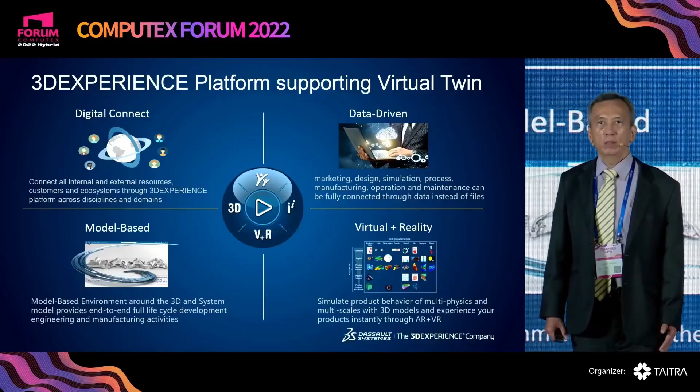And the fourth one is virtual and reality. Through our simulation technology, you can simulate your product's behavior and performance with multi-physics and multi-scale. And during the process, anytime, you can wear your AR, VR to experience your product's performance.

So on our 3D experience platform, these are just apps. You have apps to manage your project, to manage your BOM, and for social design - it's like your internal Facebook, but you're sharing your design ideas with your colleagues. You have a 3D modeling app, so you can design from material to a product, to a car, to a city.

You can just make your 3D model, and then on the same platform, you could have your simulation and manufacturing apps. You can work on your 3D data and continue to perform your multi-field simulation, like structure, fluid, or electromagnetic simulation. Then you can have your process planning for your digital plant. And on the same platform, we have an information intelligence app, so you can analyze and help make decisions quickly.

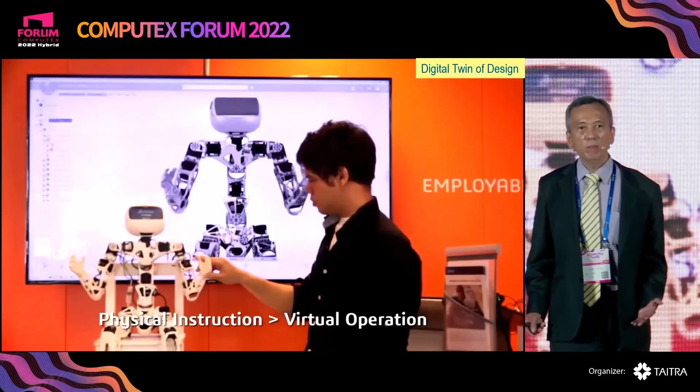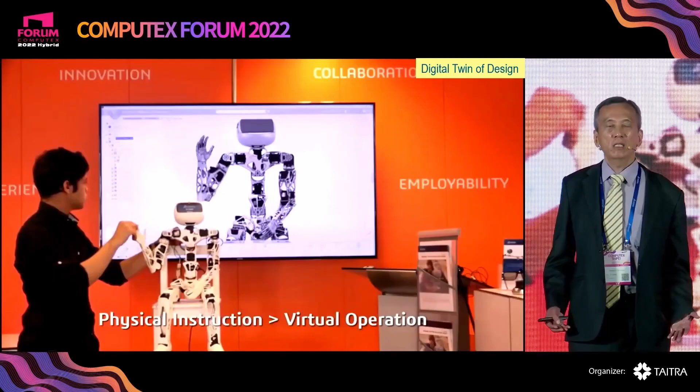So what is a virtual twin? A virtual twin is not just a 3D representation of your product. It could include the control system, firmware, software - everything necessary to make your product work.

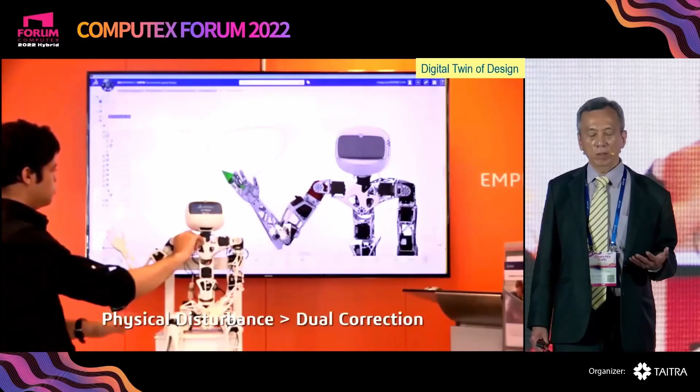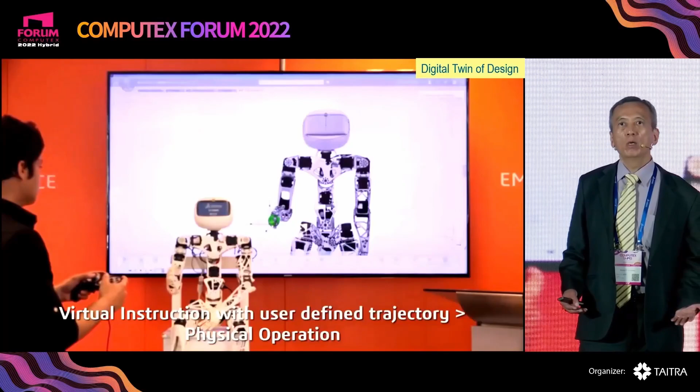When your design is complete and the product is produced, you can connect your complete virtual twin to your physical product. In reverse, you can collect data from your physical system and then analyze, optimize, and improve your production. So in reverse, it's possible for you to drive your physical system from your virtual twin - it's a two-way communication between the physical product and the virtual twin.

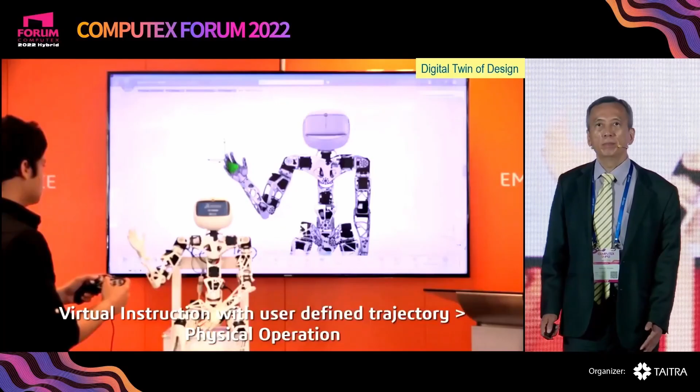During your design process, maybe some of your subsystem prototyping is ready. For example, your steering wheel is ready. You just put on your ECU, your control unit, and then connect it to your virtual twin. So your hardware can link with your digital twin and send a signal to the virtual twin to run a simulation.

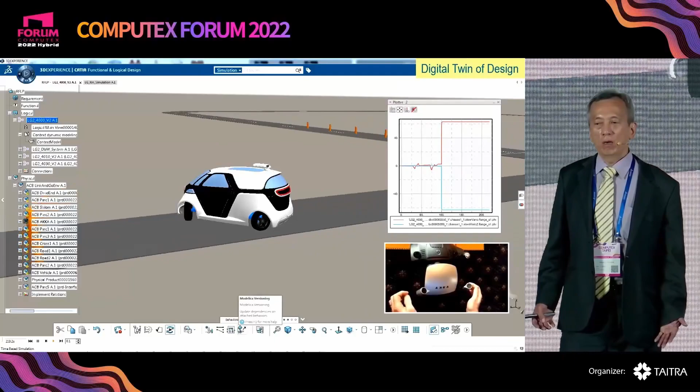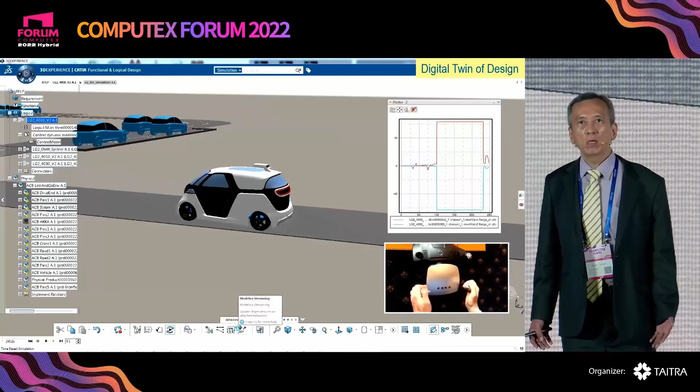So you see, you have the complete definition of your virtual car, and you are able to validate and simulate all the innovation design. For example, with this electrical vehicle, you might have a new design to turn your car around at a point. So you can validate all the control system and mechanism, to see if it works as your design. Since it's a virtual twin, you can analyze the performance of any component.

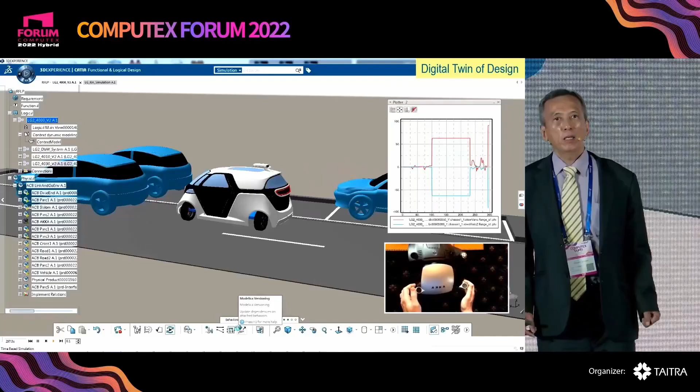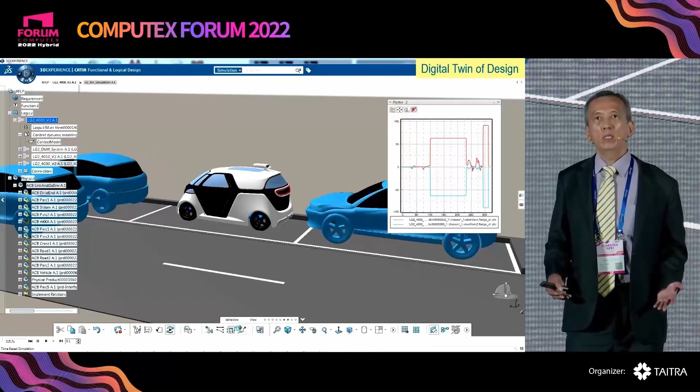You don't need to put a physical sensor on a real car. You can simulate all the driving conditions. For example, you will have an exciting innovation for you to do street parking just by driving your car sideways into the parking lot. So you want to make sure it works - with your hardware, software, everything. So this is a virtual twin of a system.

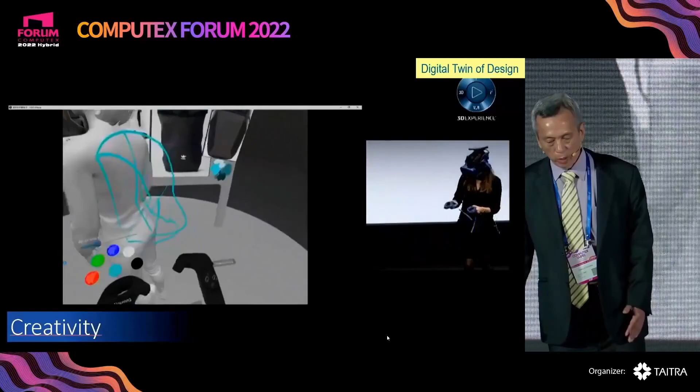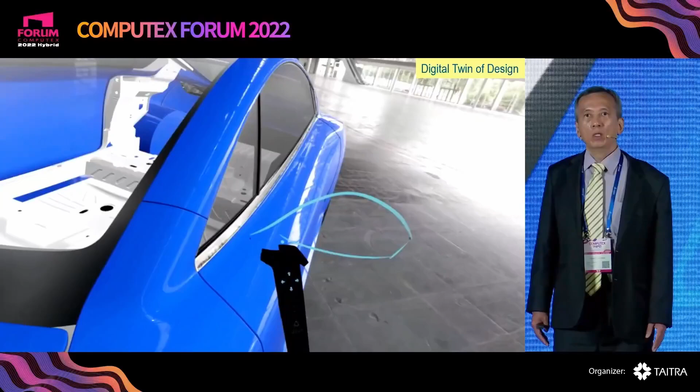So how do we work with VR, AR? First, we can use VR for design. You start sketching your idea with VR, with an immersive experience. Or even you can work with an existing 3D model, and then explore more of your design ideas and options, and then improve your product. So with VR, you can sketch, and you can even sketch on your 3D model.

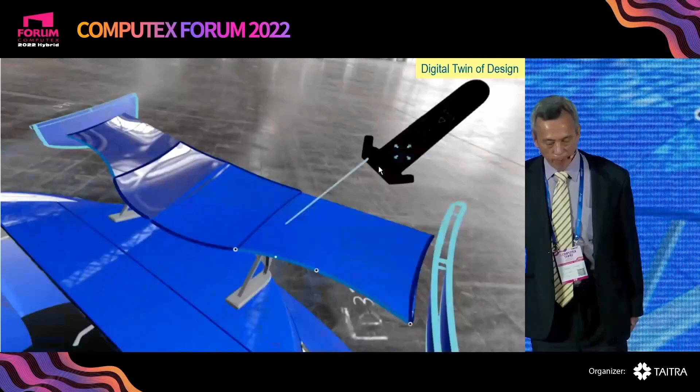It looks like you are sketching on your clay model. You just start from your existing design, and then sketch it, and you get your new idea. So this is how we provide VR to explore your digital virtual twin. You can also use VR to modify your design instantly inside your virtual twin.

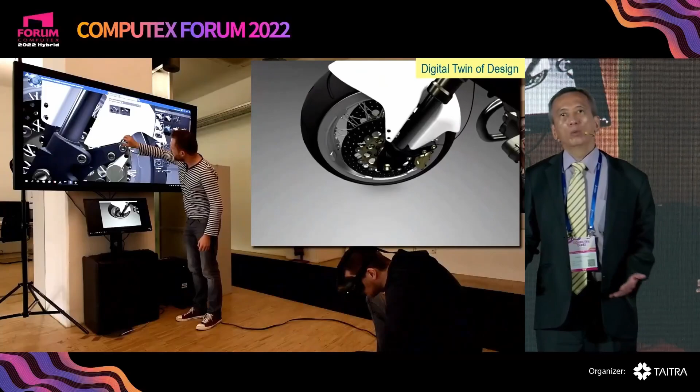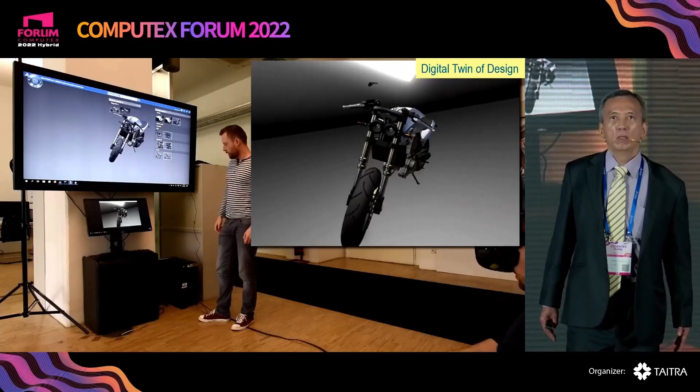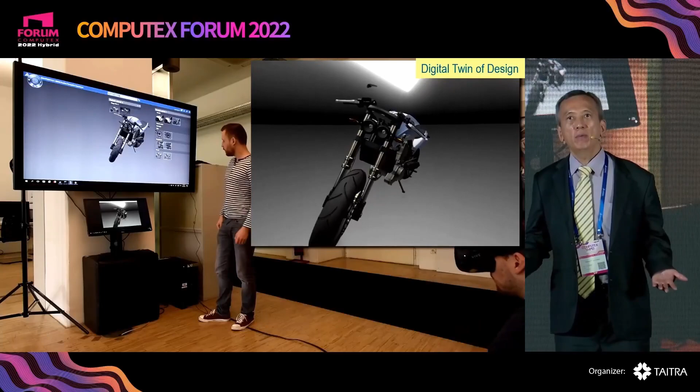Okay, so then we move to the detailed design. There are many design activities - you will design your mechanism, your metal parts, composite parts. Anytime you want to review it, you just put on your VR device. You don't need to export your 3D data to VR animation software where you'd need to redefine everything. You just stay on the same platform, just click on an app.

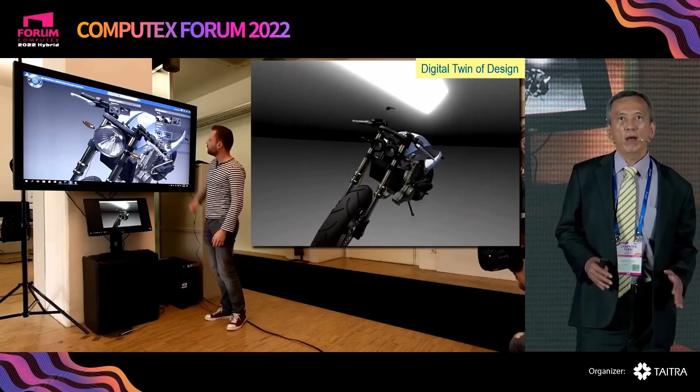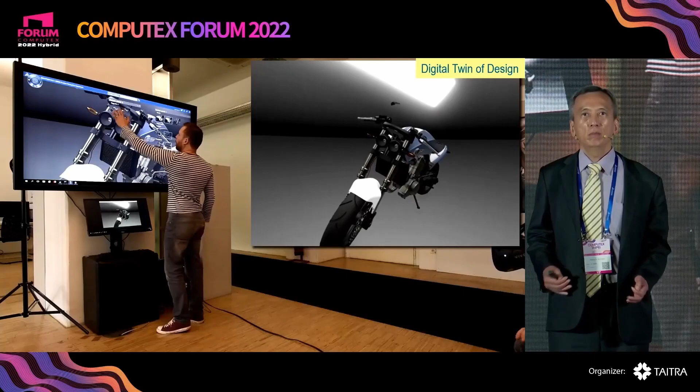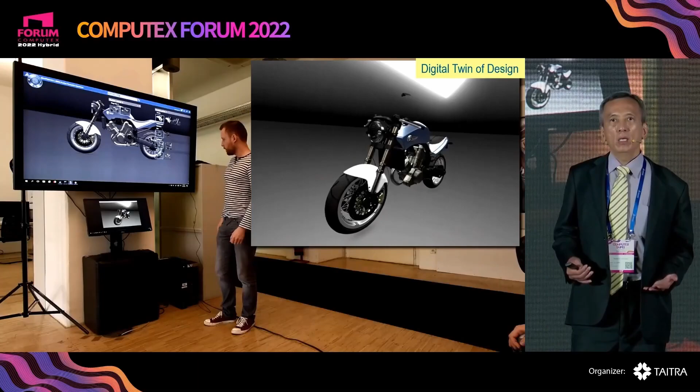So now you can review your product in rendering or in your mechanical design view. You can explore your portfolio with different combinations, different ideas, and discuss. If you have some new idea, you can just take off the VR, modify it in your system, and then come back to review. So the VR device is used for daily design and daily work - you can even work with your customer to propose your solution.

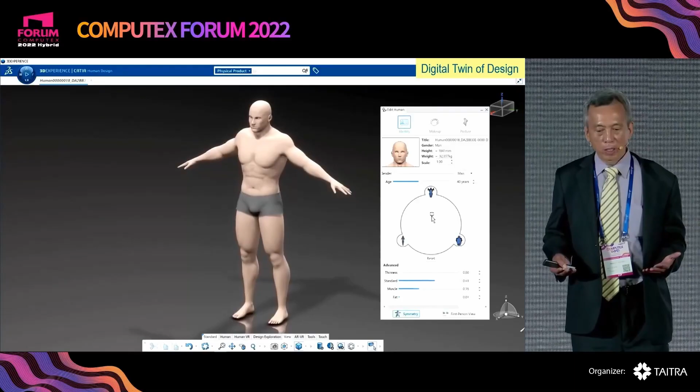So for the Metaverse, you need a human. In our virtual twin, the human should be more precise - it's not a gaming character, it's ergonomic, it's engineering. So you can define your gender, age, body shape - there are hundreds of parameters to set the dimensions the same as your body.

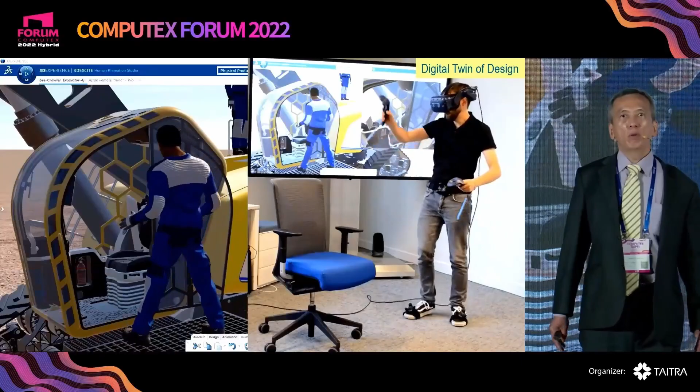When the setup is ready, you are ready to go into the virtual world of your product. You just wear the VR with a controller, with a tracker. So you go into your virtual design, and then you can review it, and make sure the design meets the mission.

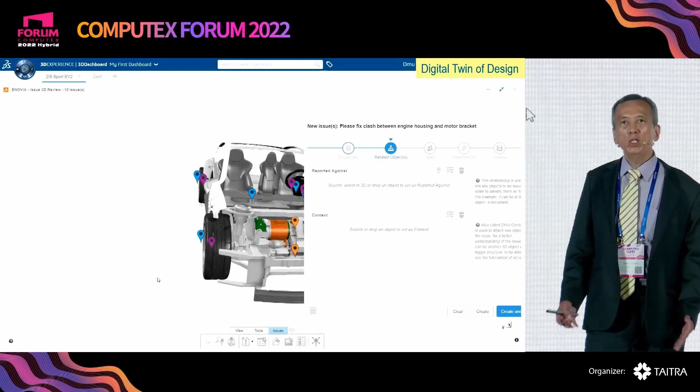So what about management? If I can manage something with 3D, yes. When you have project management, issue management - actually, as long as there's 3D, you can work with it. For example, now you want to initiate a new issue, so you can define where the issue is located, like a Google Map - now you navigate your 3D product.

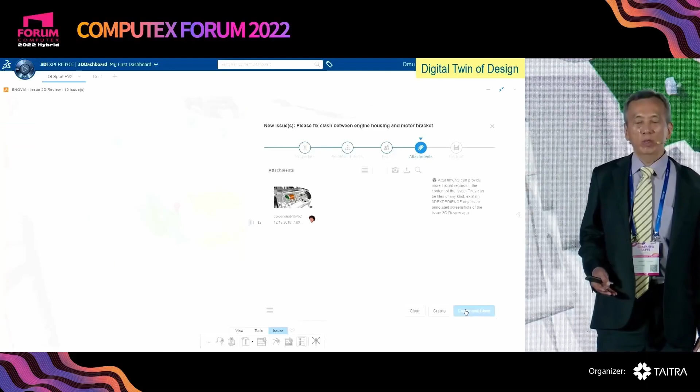And in the same 3D environment, you describe your issue, and then you assign your colleague to perform this task, and define when it will be done. You can check the status anytime - what has been done, what is pending, what needs to follow. So this is the way we manage your product in our 3D experience platform.

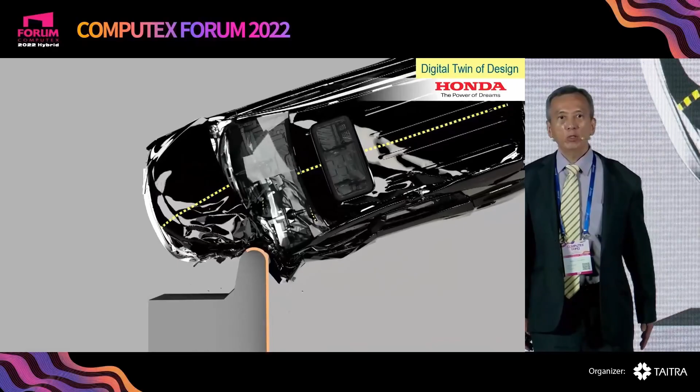So let's talk about simulation. Can you tell which one is really physical car crash testing and which one is simulated? In Dassault, we combine our technology of simulation and realistic rendering. So why is this the traditional way? You have a mesh model and you simulate your product.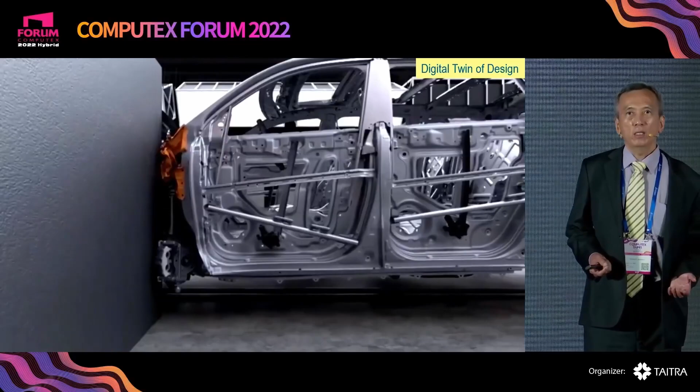So we provide a better view to review your results. You can review more information than you'd get with a high-speed camera in a physical test. You can easily remove the skin part, the sheet metal part, and take a look at the structure you want to investigate. And with realistic rendering, you can understand how the structure has been deformed. You can view from any point to understand your design after a crash.

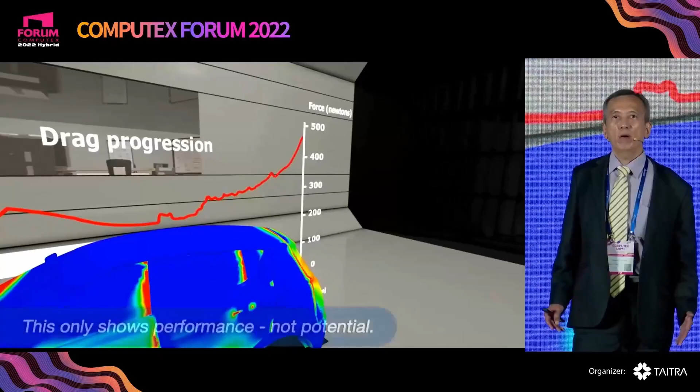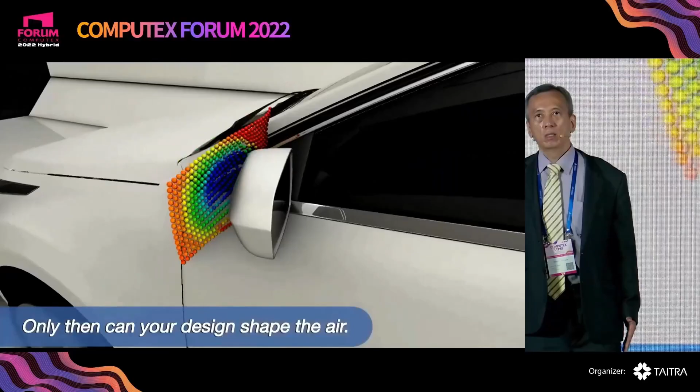So in the design phase, car companies need to have wind tunnel tests - you need the physical mockup, which is costly and time-consuming. And wind tunnel testing has limited space, so it could only show the performance, not the potential.

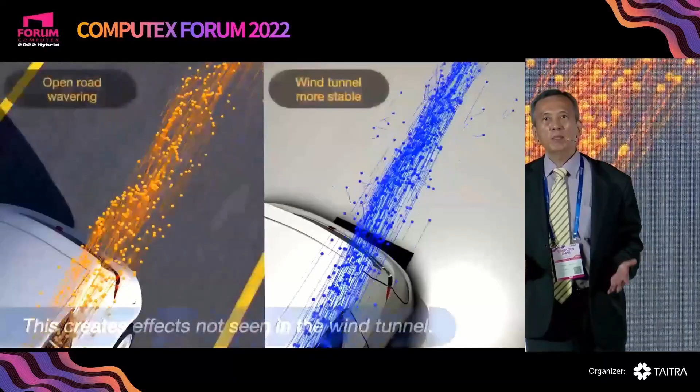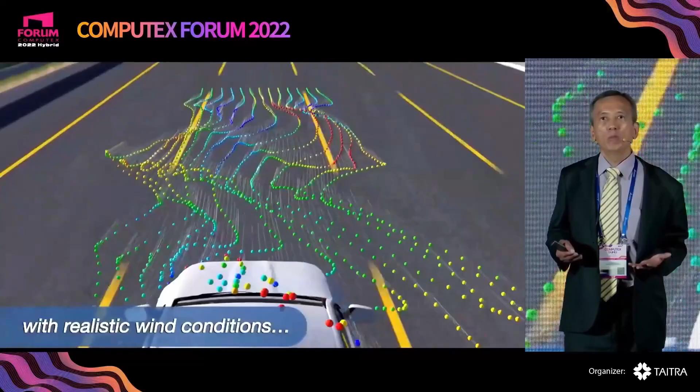So our fluid simulation solution can simulate your car running on an open road with traffic turbulence. It could create more effects which cannot be seen in a wind tunnel. You cannot make the right decision for your design if you cannot see the right effect. So with full simulation of real-world conditions, we can reveal more problems and help you make a better decision within the virtual world.

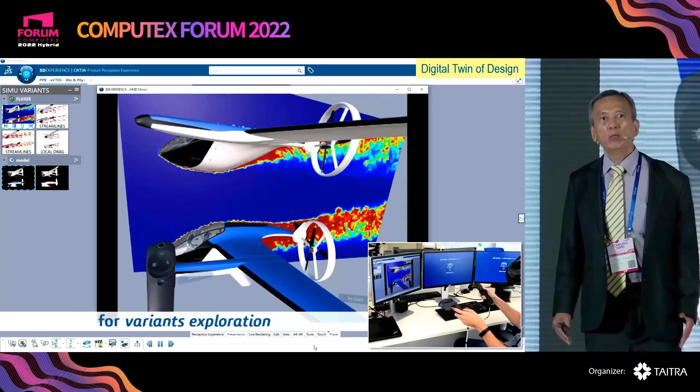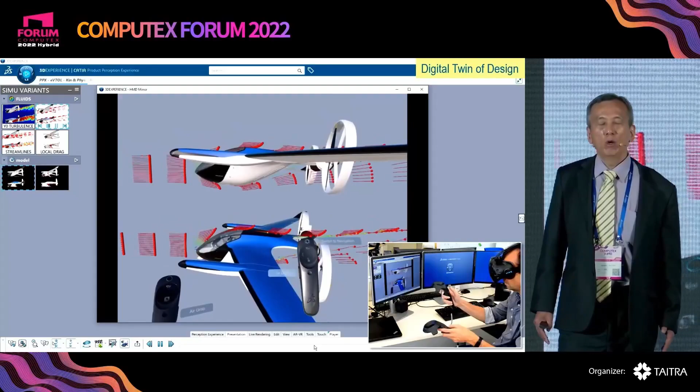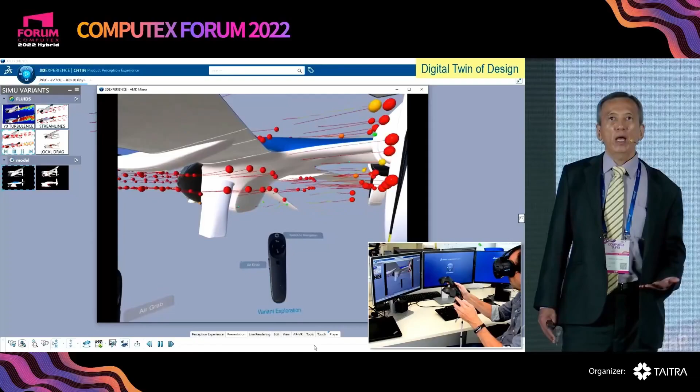So how do you work with VR? Once you have the result, you can put on your VR instantly, and in the virtual world put a different model in the same space to review the result, whether it's a fluid simulation or structure simulation. You can feel how the wind flows through your product, which helps you understand how to improve it, giving instant response for your next investigation.

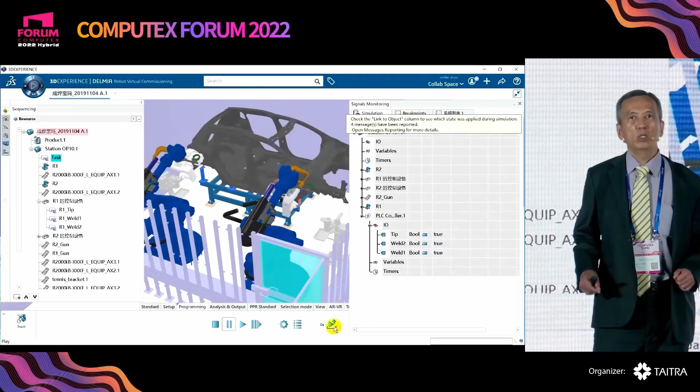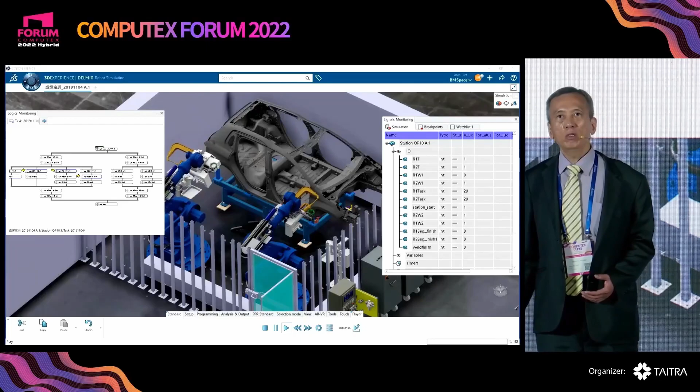Now let's talk about manufacturing. On the same platform, you just click on your manufacturing app, no need to install another solution. You can start offline programming and simulation in the virtual world. Before you put your program on the real production line, you could connect the whole system with your PLC I/O signal and run a virtual commissioning to make sure all the devices and machines work as designed.

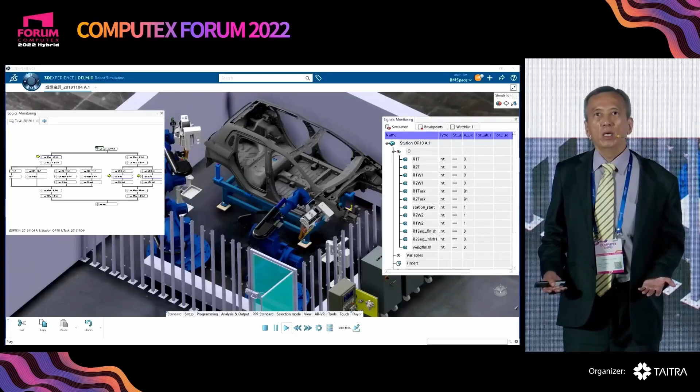Once you validate the manufacturing process perfectly, your virtual twin could then be connected to your real production line, and at that time you could use the virtual world to monitor the operation of your physical production line.

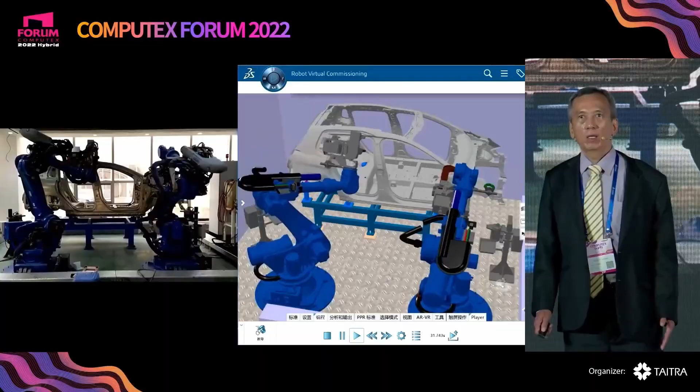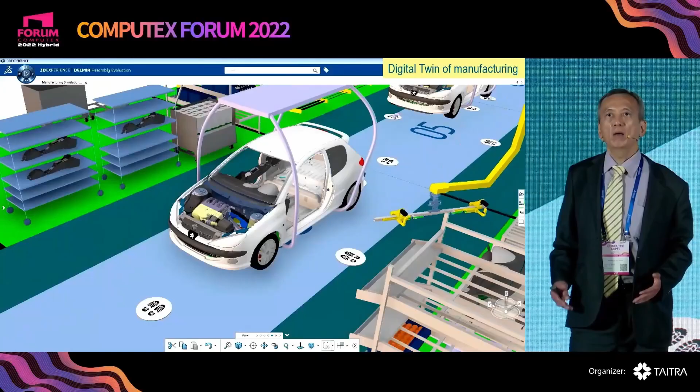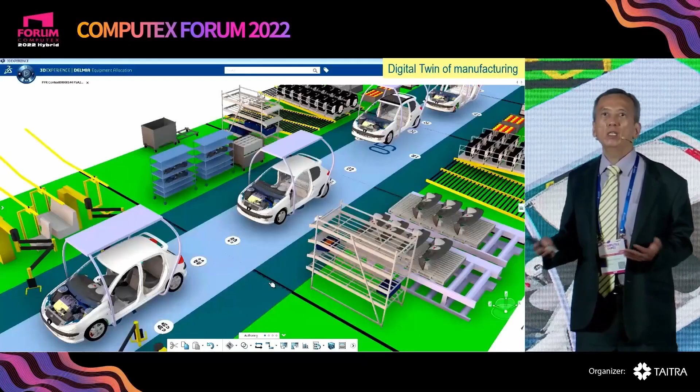Let's talk more about process planning on our assembly line. Now you can put a human here and simulate all the operation assembly processes in each station — what tools they need, what materials they need, how to operate, and the line balance. Which station is not good enough, is over cycle time, and needs rearranging to another station. Then you have ergonomic simulation of the human, to check how they could operate the assembly process properly and safely. All this is simulated in the virtual world to help you improve and ramp up sooner in your production.

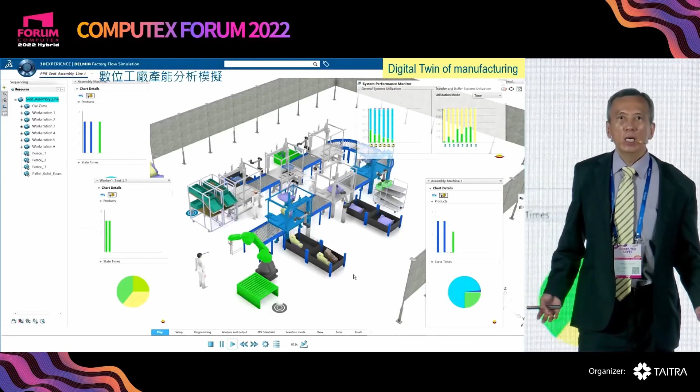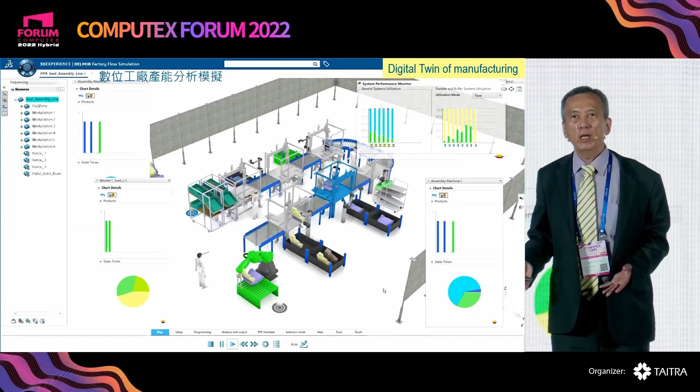After you define your process, you need material flow simulation to make sure the throughput is as you want. In the production line you could have humans, robots, and automatic machines, then check the utilization rate of each device and the total throughput, find where the bottleneck is, and improve it.

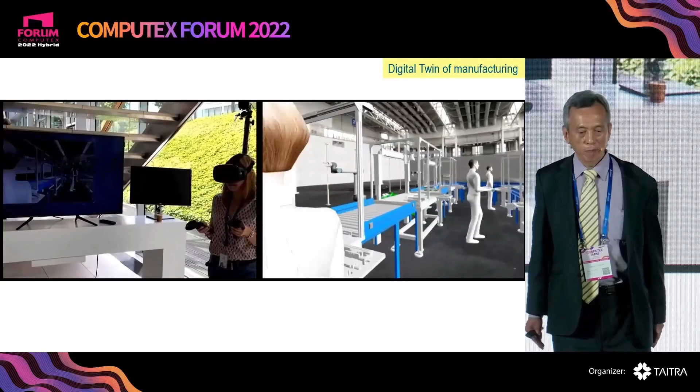After you have the design, anytime you can use VR to view the operation on your production line. You might have several proposals, send them to your review team, or even communicate with your customer, making better communication and the right decision for your manufacturing plan.

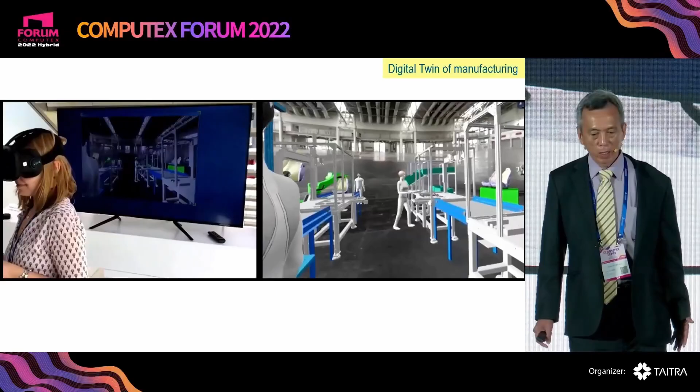Now I want to show you a testimony from Honda North America about their digital twin of manufacturing.

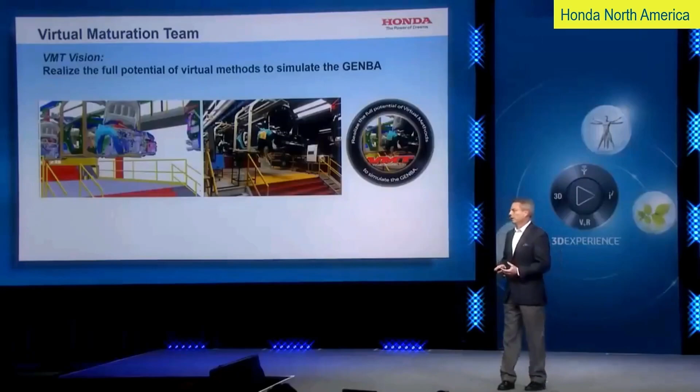Our vision is to realize the full potential of virtual methods to simulate the GENBA. The GENBA is a word we use inside Honda meaning reality, or at the spot. We want the simulation, the virtual world, to look exactly like our manufacturing situation for what we're doing.

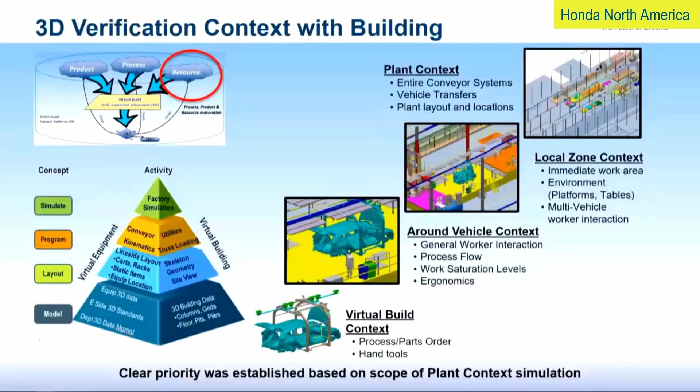We have a strategy from the model to the layout program all the way up to simulation. This is what we want to accomplish, again keeping it in the context of the plant. What you see in the bottom center area is the virtual build context — that's where we are. The images going up and to the right are what we've created and are continuing to enhance.

We had to start by building the plant. As I mentioned, we only had 2D data — we don't have any 3D data history to rely on. So we had to build the basic foundation of the plant and model it with great precision.

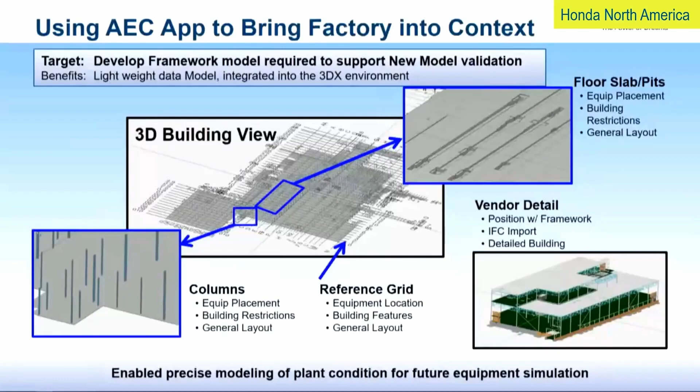Beyond that, we now have to do conveyor simulation. This is really critical for us to understand how the product moves through the plant in its various build-up states. We worked very closely with Dassault to understand how to model it and how to program it so we could get the logic to work correctly.

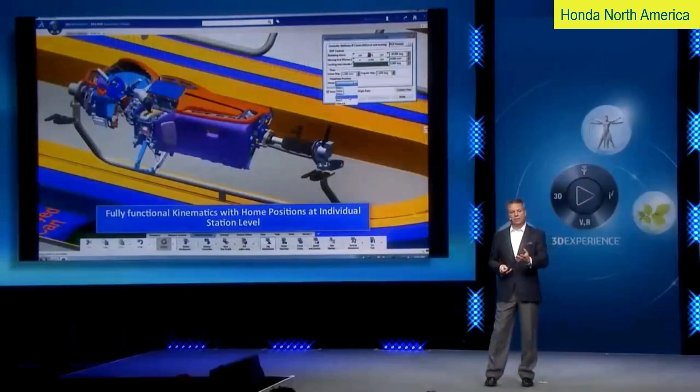This is the actual instrument panel line, now connected to the modeling. This is where we're really focusing to improve the accuracy and make sure it matches reality. We've got the kinematics of the modeling in there for the fixturing that the associates have to move up and down to do the assembly work.

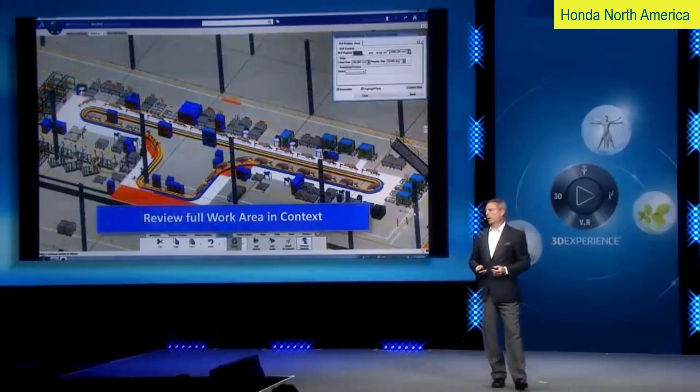We've got the conveyance systems — you can look at the local areas, and then finally at the entire work area in context, and see all the logistics containers around that, which we can expand further into the future. Now going to the main line, we're able to simulate what it's going to look like, and this is great.

As much as Honda likes to move models from plant to plant, it's really an easy way for us to verify, can we put this model in that plant? It's reflecting the actual manufacturing plant condition. This was critical in what we wanted to accomplish. And of course, we're laying the groundwork as we continue to enhance and develop this area for future activities.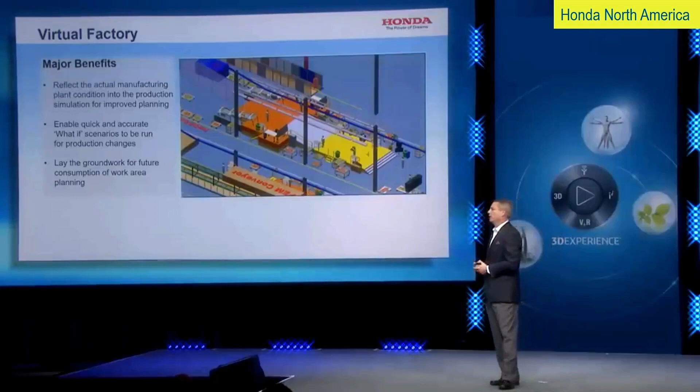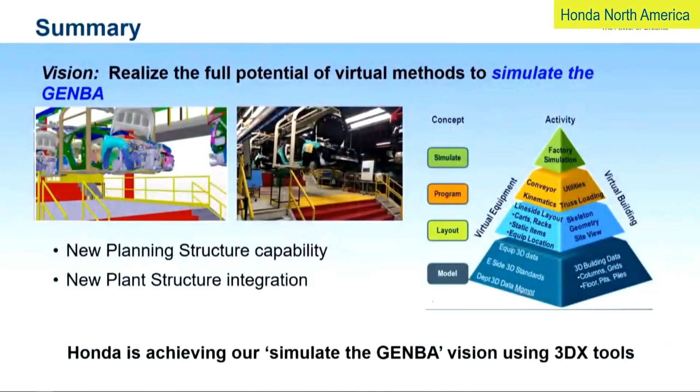You can imagine the logistics and the carts running around inside the plant to simulate that and find the optimum delivery routes, for example. So in summary, we've accomplished a lot, but specifically realize the full potential of the virtual methods to simulate the GENBA. We've got to understand that actual situation. And with Dassault Systemes, Honda's achieving our simulate-the-GENBA vision using the 3DX tools. Thank you for your time and attention.

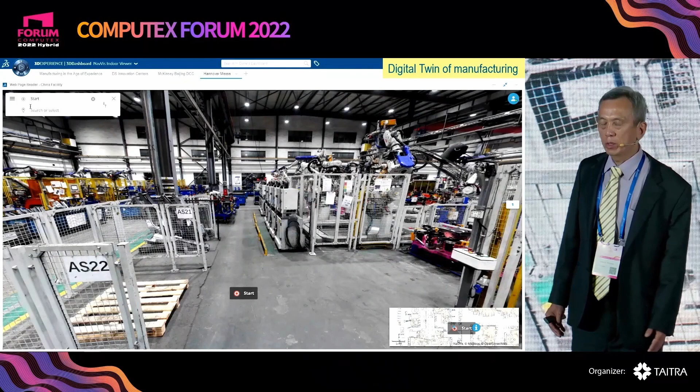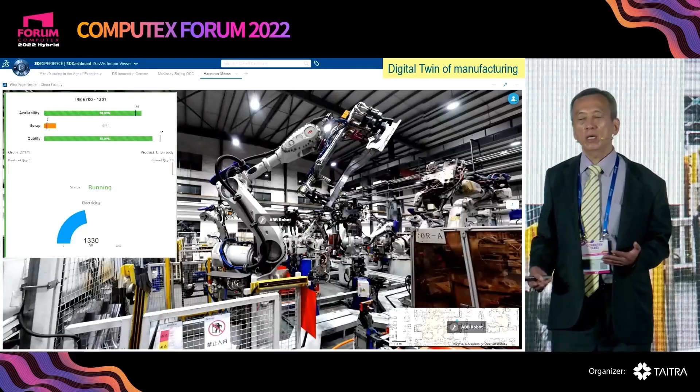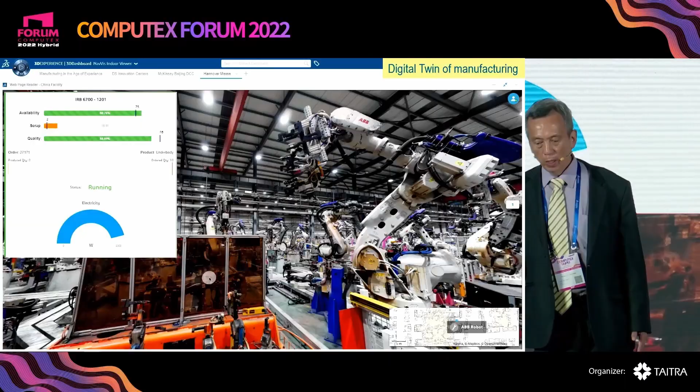So if you don't have so many videos like Honda, and you don't have a 3D plant, how do you do it? Actually, it's an easier way for you to build your virtual plant quickly. We could support the 3D scan data. You just scan your existing plant, and you get the point cloud. Then you just import it into our platform, and you could start your journey of digital twin. So you can split the point cloud as product, and link it to the IoT of your plant.

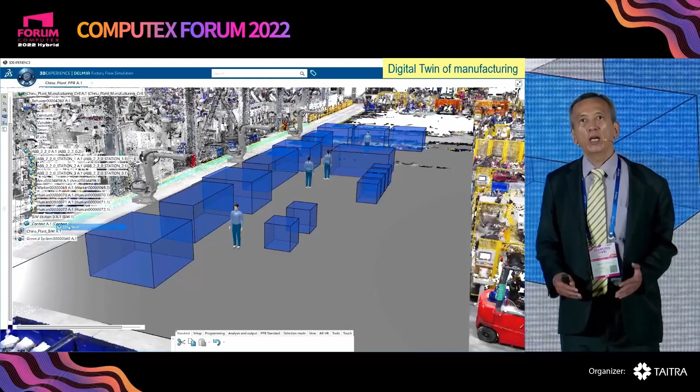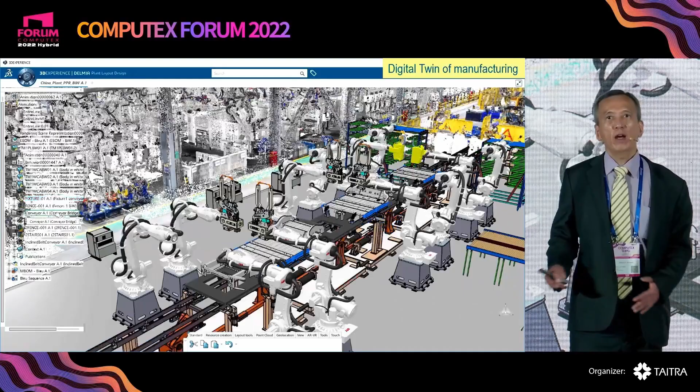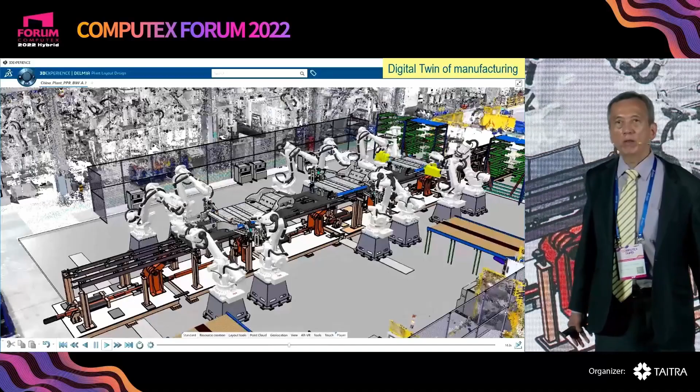So that's the first step. Now you want to improve your production line with new facility, area, section by section. So now you have a virtual plant there, so you can simulate to put on your new equipment, your new robot, put on your process, and put on your material, and then simulate the way of production, before you really move to production. You may have different ideas, you may have different ways for the production line. So through our manufacturing app, you can quickly design and validate your manufacturing process before you move into production.

So as long as your 3D plant is ready, it's not just for process planning, you can connect it to your MES system or MOM system. In Dassault we have that capability. And then you can link with the information on your shop floor. For example, if there's a red light, you can remotely know that a station has a shortage of material, so you need to send someone to deliver the right material properly. So this digital thread can extend to connect with your shop floor operation. So let's talk about certification.

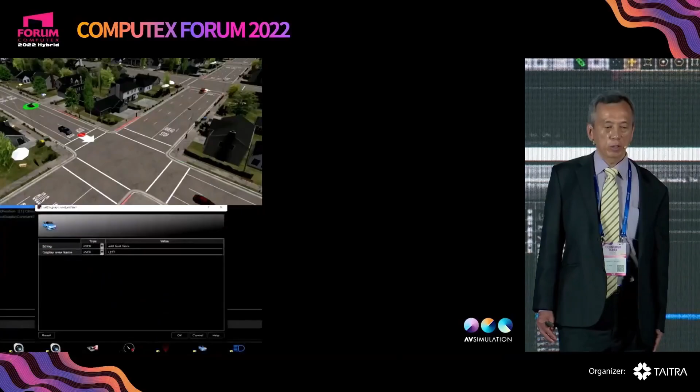We are talking about autonomous driving. Do you have any idea how many kilometers of testing is necessary to make sure of the safety of autonomous driving? It's 18 billion kilometers. So it means you need a lot of prototyping, you need a lot of people. It's truly time-consuming and very, very costly.

So with our digital thread testing environment, you can connect the environment with your driver simulator, with your digital twin of your product, and then simulate. You can set up the environment, different road conditions, different weather - is it raining like today, or is it snowing. If suddenly some passenger crosses the road, or there's an incident with an animal - anyway, you can set up many different road conditions and simulate simultaneously, which will reduce a lot of your physical testing, even though physical testing is still necessary.

Okay, so then you move into selling your product. With VR, you don't need to set up a huge car showroom to put the whole portfolio of your car for your customer to make a decision. Actually, you just put on VR for them to explore different features and then make a decision quickly.

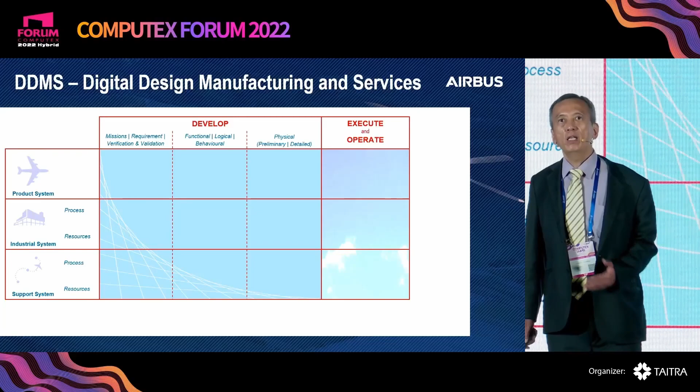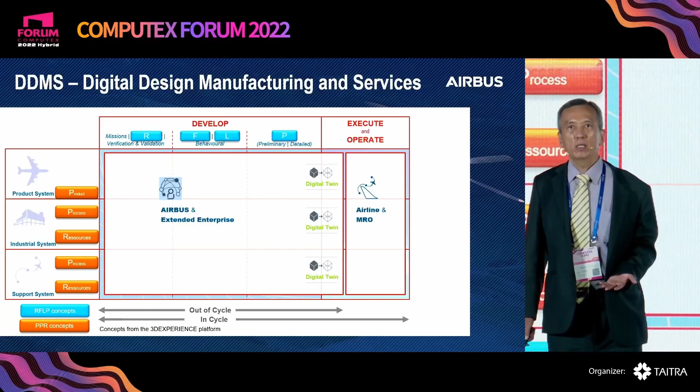And the last point I want to talk about is the digital twin of human. So Dassault Systemes, in 2014, we worked with researchers, industry, clinics, and regulator FDA. We signed a 5-year agreement to develop the world's first medically labeled human heart model. This model includes structural and electrical stimuli and fluid simulation.

Scientists are able to investigate for the first time how their medical device will be implanted into a living heart, and how it will work in 3D. It reveals more detail than animal and human tests. So this project was quite successful.

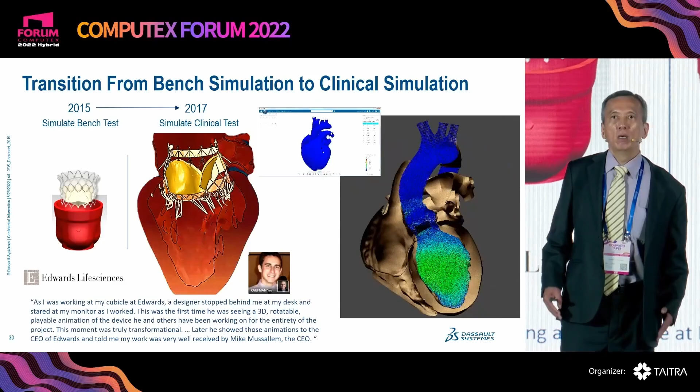So in 2019, we signed another 5-year project to continue improving the digital twin for humans. We started to build models for the brain and other body parts. So as long as you have 3D, you can just wear VR to explore the human body in detail. So Dassault Systemes, starting from 3D software, we provide a digital twin of product design, and now we extend this to a twin of human to help us make a more sustainable world.